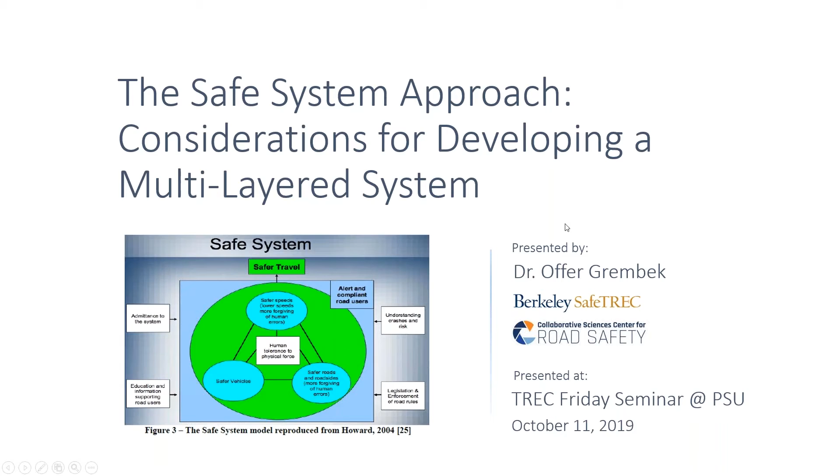As some of you may know, California this week has had a lot of electric outages, and it was part of PG&E's public safety power shutoff. And they identified 3 elements as to why this shutoff was necessary: low humidity, sustained winds, and dry fuel on the ground. And as a result of that, they said that they need to make a significant major shutoff to maintain safety. And when I heard it, I started thinking of how does this relate to transportation safety. And I noticed that they are very focused on what are the things that can make it unsafe.

And the response was, to maintain safety or to produce safety, we need to cut off the power to more than 730,000 accounts. These are not people; people is way over 2 million across 34 counties for 3 days. So the UC Berkeley campus was shut down for 3 days as a result of this. And the outcome, as was described by PG&E, is good because there was no fire and no one got hurt. And that would be true if their goal is to produce safety.

But if you're able to produce safety by shutting off the power, you're not quite fulfilling the mission of your organization. Because the way I see it, their purpose is to provide electricity subject to a set of constraints. And that's really related to what I'm going to talk about today, which is the safe system approach. The idea is that we need to provide mobility, but again, subject to a set of constraints. So what I'm going to talk about today is 3 things. I'm going to start by talking about the safe system approach and how it relates to safe vehicles, safe roads, and safe speeds. Safety buffers, which are all of these multi-layered components that together provide the opportunity to build a system on which no one can be severely or fatally injured. And then at the end, touch on some of the policy implications, because we do want to be able to translate this to practice and to policy.

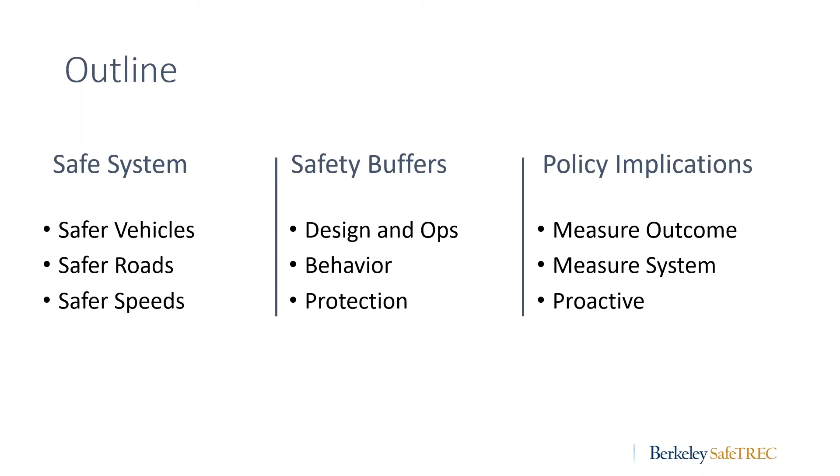So as I said, and I really appreciate PG&E's timing, the purpose of the transportation system is to provide mobility. Now, this isn't necessarily a consensus definition, it's more my definition, but if you pause for a second and think about it, I'm sure that you'll agree that at the end of the day, this is the overarching goal. But it's always subject to a set of constraints. We need to provide efficient mobility, cost-effective mobility, equitable mobility, sustainable mobility, and the theme of my talk today, safe mobility. Now, all of these constraints are equally important. I'm a little bit biased because I do traffic safety research, but in my mind, safe mobility is the most important one because it's a transportation failure that results in someone not getting home.

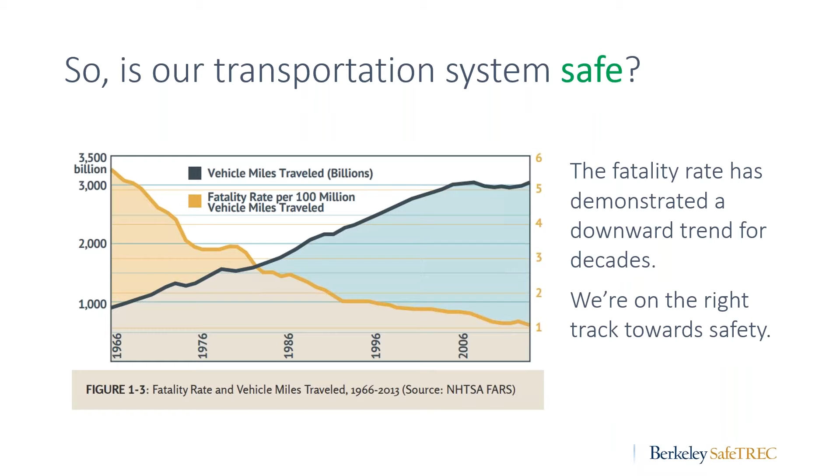So is our transportation system safe? Well, let's look at the numbers. This orange curve represents the fatality rate per 100 million vehicle miles traveled. As we can see, for decades, it's been dropping. So there's some demonstrated improvement. Maybe we are on the right track to achieve safety.

The number of fatalities per year, the numbers are very high. In California itself, just in California in 2017, there were over 3,600 fatalities. In the US, over 37,000, and globally, more than 1.3 million. So it's definitely not a safe system, and we're definitely experiencing a lot of fatalities.

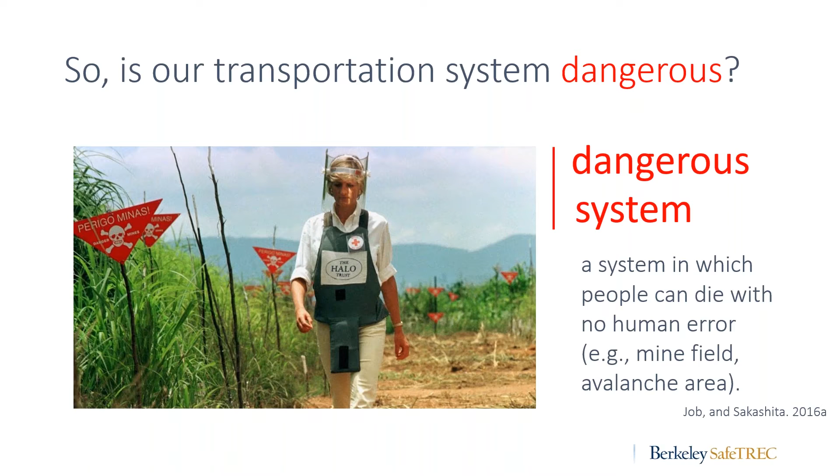So is our transportation system dangerous? Let's look again at how can we define it. And here it's defined as a system in which people can die with no human error. It can be a minefield, avalanche area. So even if you did nothing wrong, you can still die. So we're calling that a dangerous system. So we're not a safe system, but we're also not a dangerous system.

So what is this transportation system that we have? It falls in the middle. It's an unsafe system. And an unsafe system is one in which people can die through human error. So if all of the system does exactly what it was designed to do, if all of the road users behave exactly as they are expected to behave, maybe it will be a safe system, but the reality, as we know it, is that things do go wrong, and then as a result of human error, people still die.

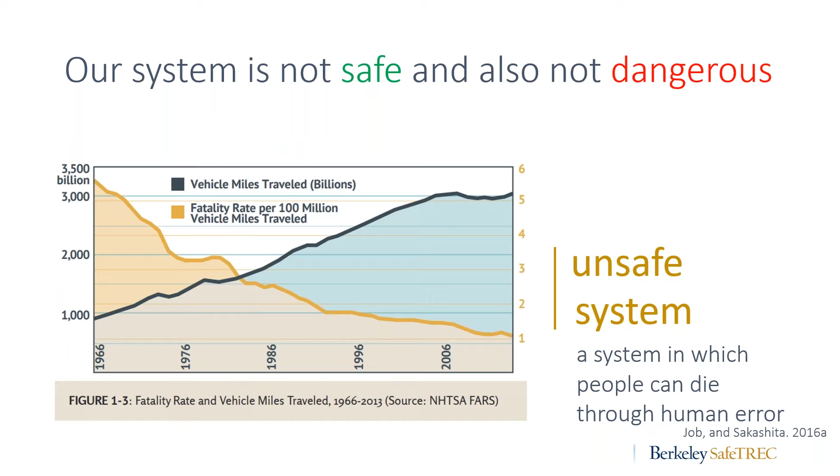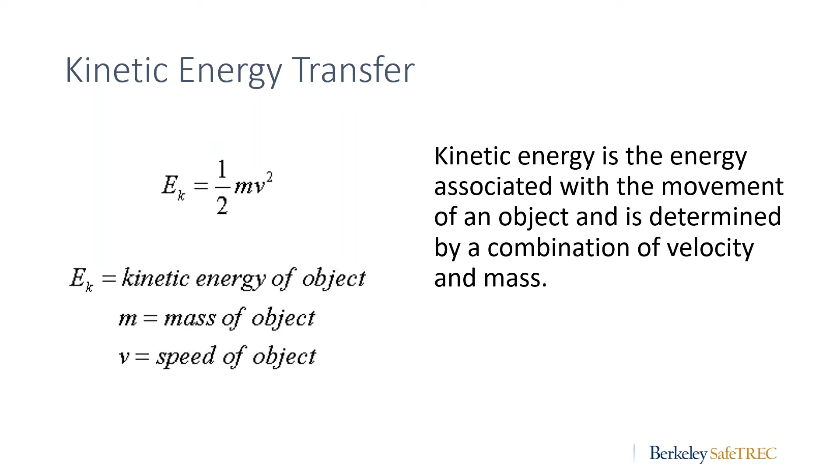Now, all of these deaths, we know that at the end of the day, it's not necessarily the crashes that are a problem, but it's more the kinetic energy. And it's the kinetic energy that is the transfer of this problem from a crash occurring to a fatality or severe injury, because it's this kinetic energy that our bodies cannot quite sustain. So why is kinetic energy so important? So as I said, first of all, it's because that is the source of injury.

But second, it's also because our traffic system is multimodal. And we have a variety of road users. We have pedestrians, we have bicyclists, we have powered two-wheelers, cars, SUVs, buses, and trucks. And actually many more modes. And these different modes, they carry different amounts of kinetic energy based on their mass and their velocity.

These are just numbers for urban environments. They're not necessarily accurate of my weight also, but they help us demonstrate that there's a very big range between the 0.1 kilojoules that are carried by a pedestrian and 57.6, 500 or 600 times more kinetic energy that's carried by a car. Now, if this is at urban speed of 20 miles per hour, you put that on a highway and the kinetic energy is even much greater.

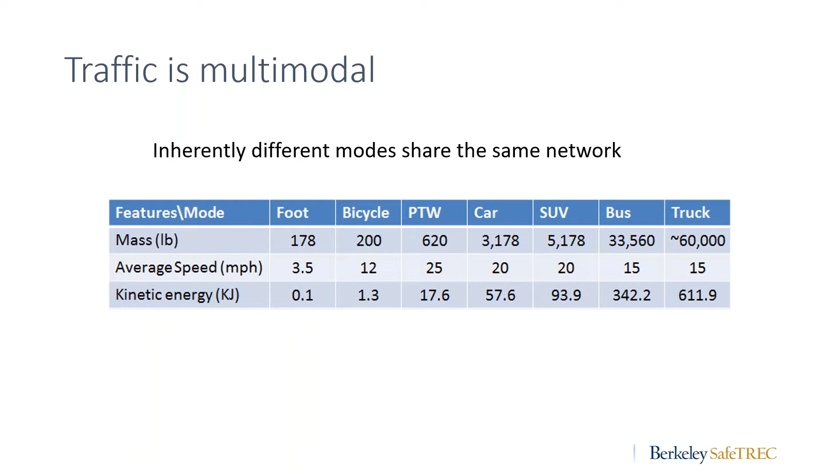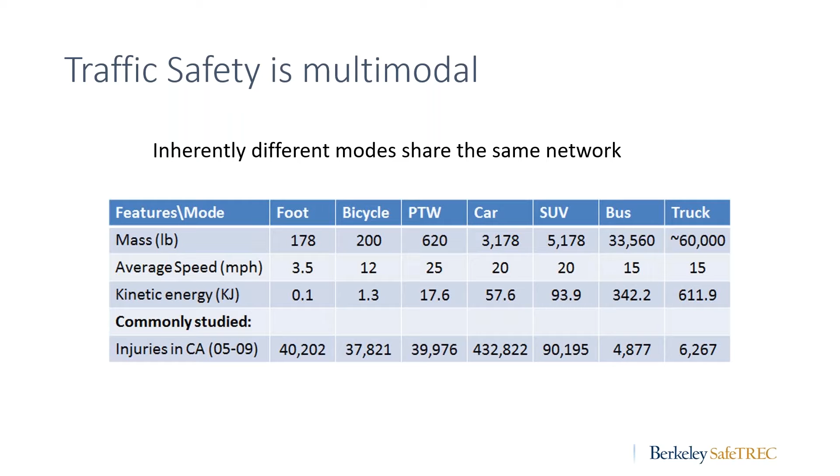So we see that we have this multimodal system, and as a result of that, we also need to think of safety in the multimodal context, because there are all these different modes that are mixed together, carrying very different levels of kinetic energy, and that imposes a lot of complexity on our system. So we try to think about that in a little bit more structured manner. And in our center, we developed this multimodal injury matrix.

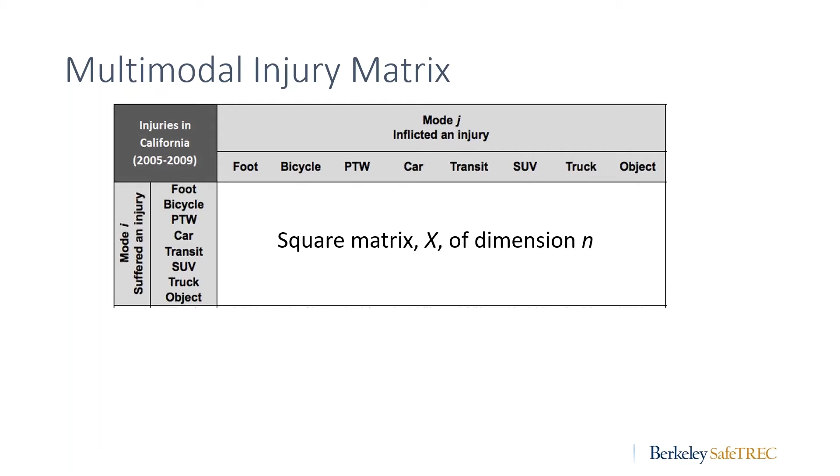Now, suffered and inflicted does not necessarily mean fault, but it means there was a result. There was a crash between two modes, and as a result of that, this mode suffered an injury. By definition, the other mode inflicted that injury. If they both suffered an injury, then it counts twice, because there were two injuries that were experienced.

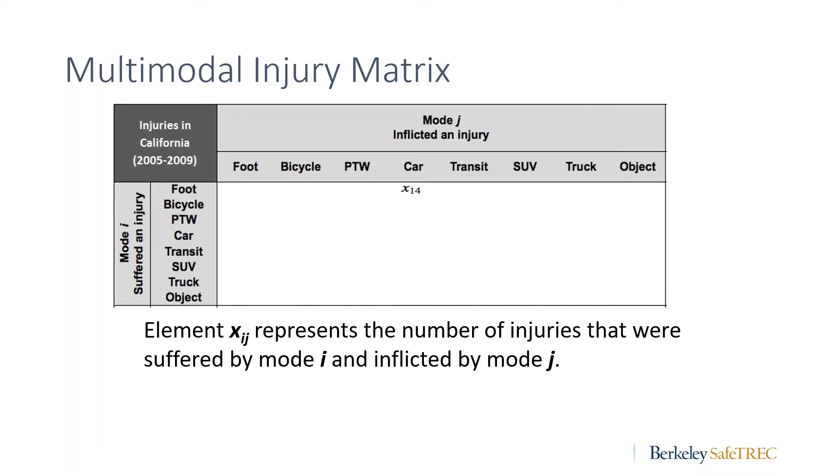So what it means is that element Xij of this matrix represents the number of injuries that were suffered by mode i, X1, and inflicted by mode j, X4. Okay, so if a pedestrian crashed with a car and only the pedestrian suffered an injury, X14 would have 1. If both the pedestrian and an occupant of the vehicle suffered an injury, then X14 would get the value of 2. Okay? And then we populated that data for injury crashes in California.

And it's kind of a nice snapshot of what modes are inflicting and suffering injuries from other modes. And I'm not going to go into the details of what the different cells mean, but I'll talk much more about the aggregate. So when you add up all of the rows, you actually get the numbers that we're usually talking about in traffic safety, and that's the sum of pedestrian injuries, the sum of bicycle injuries, and so on. But these sums give us an opportunity to see what is the relative vulnerability of these modes for the California mode mix and built environment.

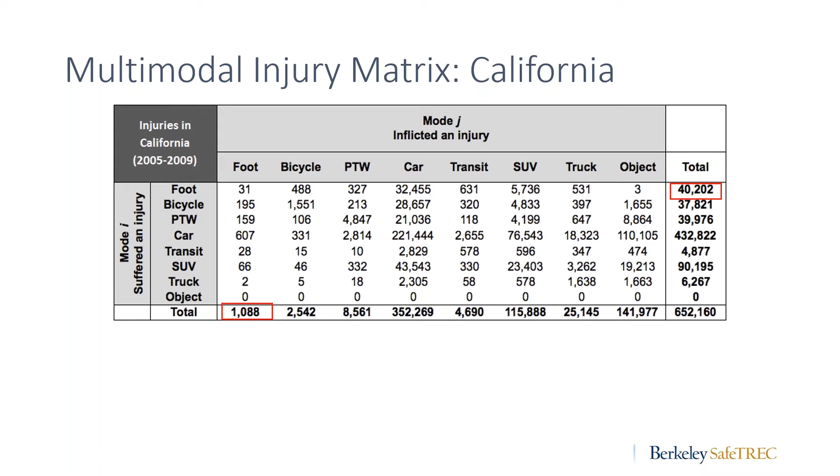So if we take the 40,202 pedestrian injuries in California, or injuries suffered by pedestrians, and we divide it by the number of injuries inflicted by pedestrians, we get a rate, and we're calling that rate the relative vulnerability. So in this case, it comes out that pedestrians suffer almost 37 times more injuries than they inflict.

Now, usually at this point, I get a question: how can a pedestrian inflict an injury on the car? And the answer is, well, first of all, it doesn't happen much, but it can happen that as the result of a crash with a car, there will be a rollover, a vehicle might crash into some roadside elements, and as a result of that, the car occupant can also suffer an injury.

Now, when we do the same across these different modes, we'll get this vector that is organized in a way that's the same as the kinetic energy that they're carrying that we saw before. And it helps us illustrate how complicated it is to design for a system with so much variety of road users and kinetic energy.

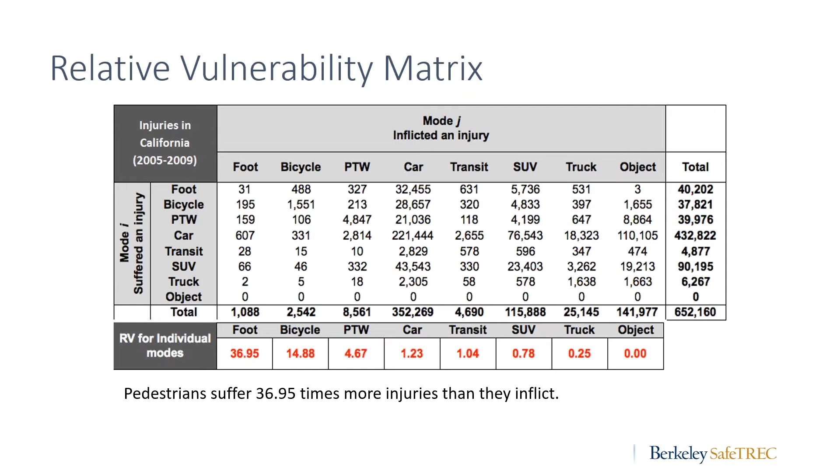So all of these realities, that there's so many crashes and there's these multimodal misalignments, lead us to thinking about what can we do to move the needle from our currently unsafe system to a safe system on which no one can be severely or fatally injured. And fortunately, there's been a lot of thinking about this. It started with the work they did in Sweden with Vision Zero, in Australia with Safe System, in the Netherlands with Sustainable Safety, and in the US with Road to Zero and Towards Zero Deaths.

And they all have a slightly different flavor, but they all have a common denominator: first, they challenge our ability to reach zero without making a major change. And the second part is that they're all multi-layered systems approaches. They think about it from the perspective of the system. So what I'm going to highlight in the next few slides is how this translates in terms of the safe system approach. And as I said before, Vision Zero, very similar, Sustainable Safety, very similar.

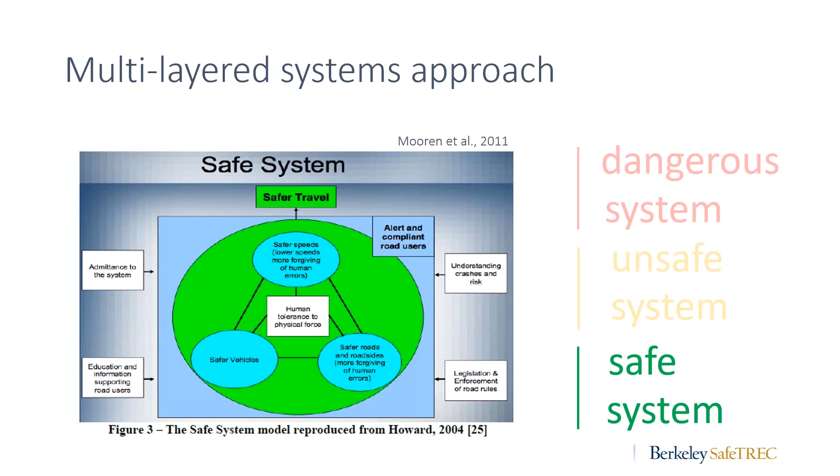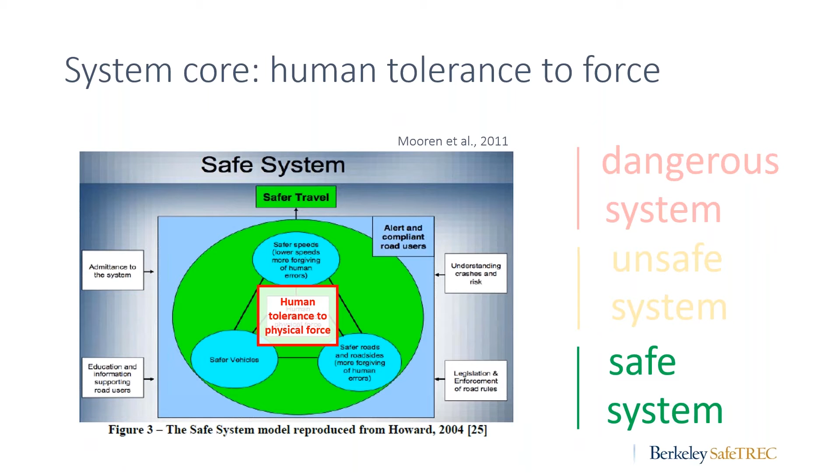And it all boils down again to human tolerance to physical force. And that's something that I keep on iterating in my talk, but it's also something that is consistent across these different approaches. So at the core, we have human tolerance to physical force. And as you can see around it, we have three components that I'm sure you all are aware of and have been thinking a lot about.

The first one in the bottom right is safer roads, and that's the design of the road facilities. The second one is safer vehicles, and that's the design, crashworthiness, and other elements of the vehicle. And then the last one is safer speed.

And we typically think about all of these. There's nothing new here. But what these approaches do, they remind us that it's not just about the individual capability of all of these. It's much more about alignment. So we want that the combination of the roads, the design of the roads, the design of the vehicles will be aligned with the speed that the vehicles are actually going.

So it's not that we just want to reduce speed or we just want to increase speed. We actually want to manage a speed that would allow vehicles, pedestrians, bicyclists, would allow the mobility without compromising their inherent tolerance to physical force.

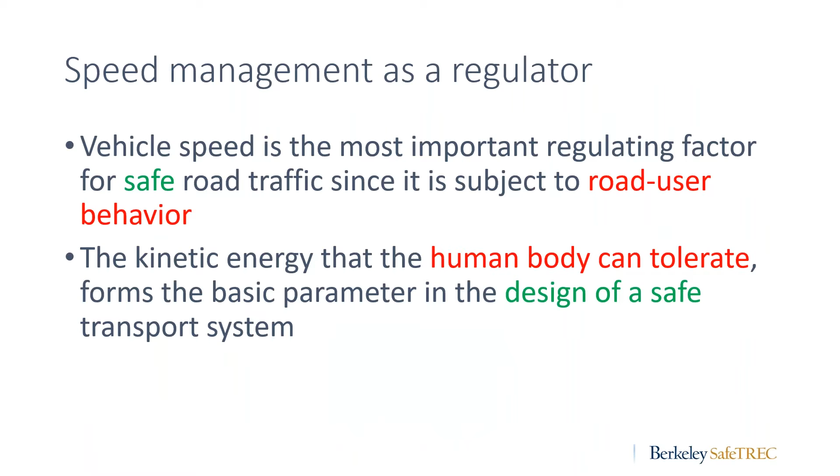I'll skip this a little bit because I want to be more mindful in time.

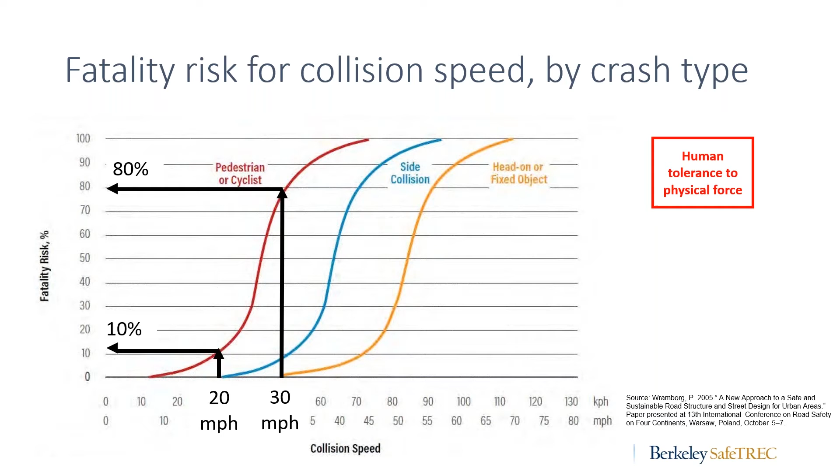So that is what captures this human tolerance to physical force, and it's based either on crash reconstruction or simulation studies. So that's item one. Then based on that, it helps identify what an acceptable or a safe car can accomplish. So based on these curves, a safe car can protect occupants up to 45 miles per hour in a head-on collision. Similarly, it can protect occupants up to 30 miles per hour in a side collision, and at what velocity it can also provide protection to unprotected road users.

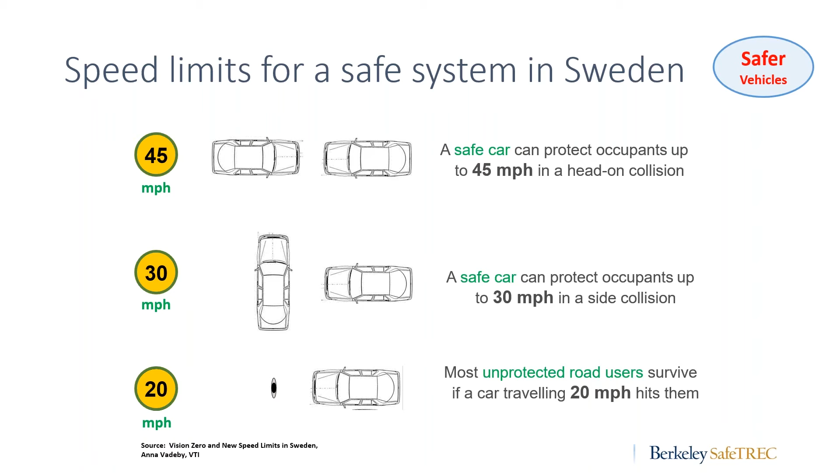And then that's where the component of the safer vehicles comes in, because the vehicles have a lot of protective capability, much more to the occupants than to the unprotected road users. But again, it brings the idea that now we need to consider the cars. And then the last piece is, what should be the speed limit given the human ability to sustain force and the vehicle design? Then we set the speed limit based on that.

So if we have roads like this, rural roads, two-way, and we saw that at 45 miles per hour the vehicle can provide protection to the users, then that's what we set the speed limit at. Similarly, if we have a much higher quality facility, such as the one here, they call it in Sweden 2+1 roads. So they have two lanes in one direction, one in the other direction with a cable barrier in the middle, and then every few miles they alternate.

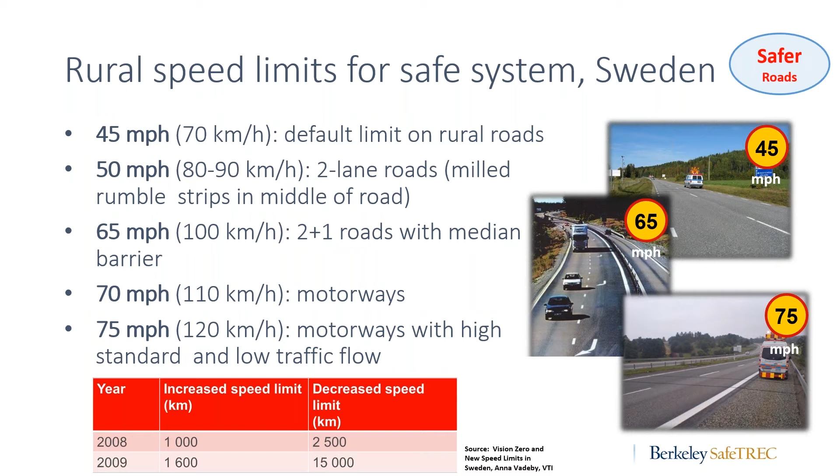And what that does, it almost eliminates head-on collisions, which we saw are the most fatal ones. So once that element is there, now they can increase the speed limit to 65 miles per hour because there are not going to be a lot, preferably no, head-on collisions. So now we can afford to go at faster speed. So that's where the safer roads come in. So we're creating this triangle of roads, vehicles, and speed.

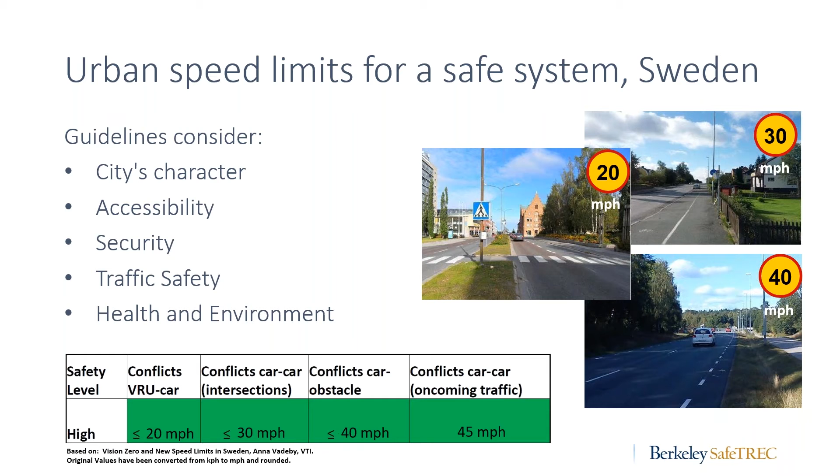Similar things are happening in urban environments, but over here they kind of just set the maximum, but they allow the agencies to reduce that even more based on some other guidelines that they need to consider.

So we talked about what's at the core of this, and we didn't really talk about the users. And when we think about traffic safety, the users always come in. It's always about the users and a lot of blaming of the user's behavior. And the safe system approach actually recognizes that as humans, we're far from perfect. And the requirement is that the users are alert and compliant road users. What do we mean by alert and compliant?

And I always like to use these minions to explain it. So here on the left, we have a goody two-shoes minion. And this minion is not me. And this minion has always had a full night of sleep, is always happy, is always on time, and he does things exactly as was expected.

That's on one end. And on the other hand, we have a much more error-prone minion, which is a lot more like me. This minion's name is Carl, and Carl is always a little bit tired, sometimes gets emotional, a little bit late, and he's always kind of just not necessarily meeting all of the expectations for every single moment. There are times that Carl is doing it well, but every now and then he is going to mess up.

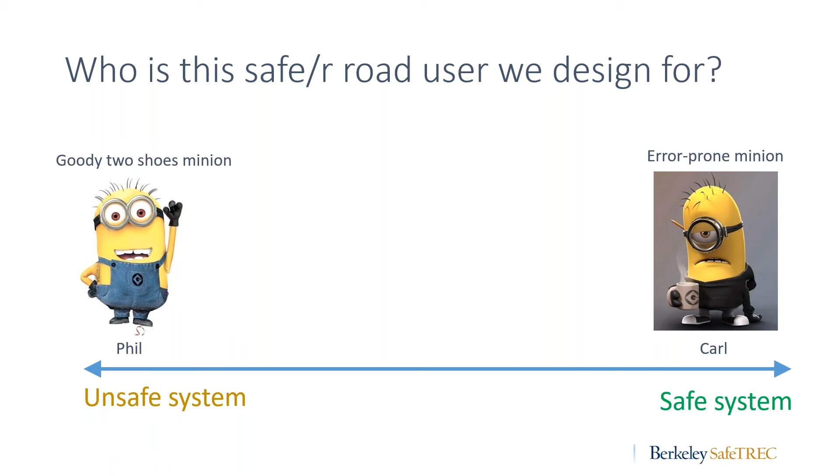And that is important because if we design our system for people like Phil, since we're not all like Phil, at some point we're going to mess up, and that will result in an unsafe system if we expect everyone to behave perfectly. But if on the other hand, we recognize that at some point we will make a mistake as a result of misjudgment, as a result of some instantaneous lapse of attention, we are much more likely to have a safe system because we've incorporated enough buffers to account for the offsetting behavior that some of these road users will do.

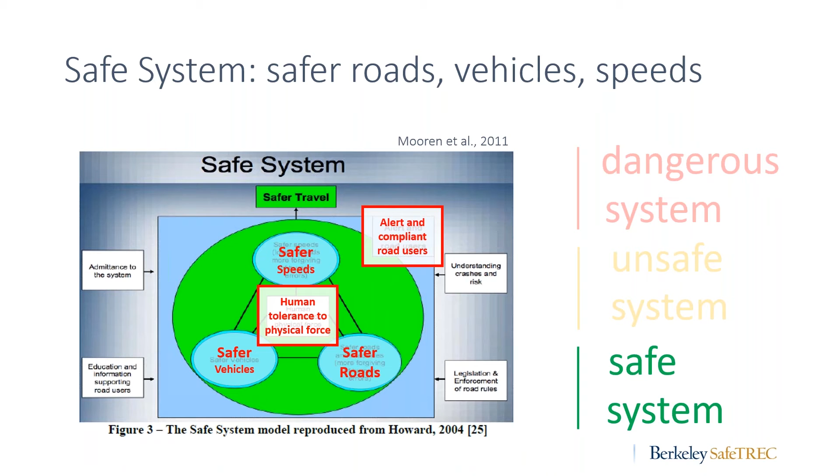So these are the guidelines, or these are the basics or the fundamentals of the safe system approach. And again, it's this triangle of safety combined with recognizing that the road users are going to mess up. So where do we go from here?

Because even though this is clear, it's well articulated, whenever we come to talk about it with agencies, they ask, okay, so what am I doing tomorrow? Or what does that mean for policy? And we haven't found a good way to answer that question, because the answer is, oh, we should aspire for 0 deaths, and we should just keep on doing what we're doing with more intention. But that doesn't necessarily give us the traction that we need.

So what we're doing now in a project that's funded by another national UTC, the Collaborative Sciences Center for Road Safety, we started a project that's attempting to develop a framework to combine these different protective elements or features of a safe system. And the way we're doing it, when we started, we tried to see if we can articulate what is the essence of the problem that we're trying to solve.

And we took the case study of cyclists, and we came up with this paragraph. What we want is alert and compliant riders to make trips using safe bicycles on safe street design with adequate separation from safe motorized traffic, driven by alert and compliant drivers, all of which are governed by safe speeds and supported by effective cyclist protection and the medical emergency system when needed.

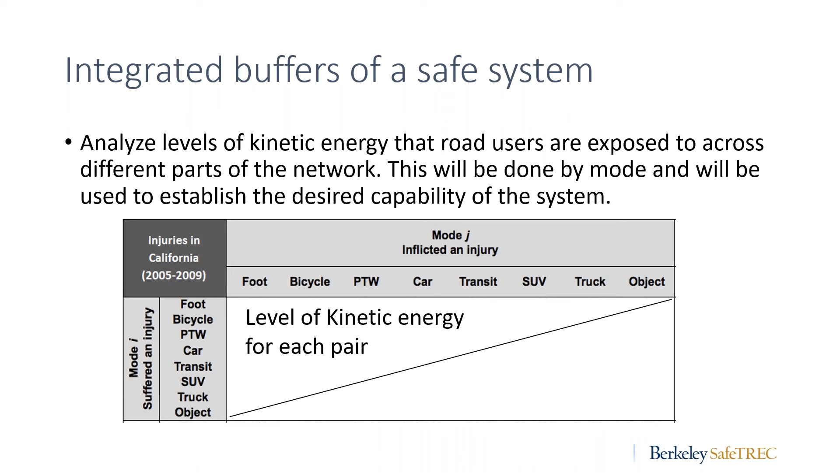So what are the policy implications? If we're able to quantify the level of kinetic energy carried by these different users and different conflicts that the empirical data tell us is being realized, then we're able to set the policy and say at these type of facilities where there's a lot of potential conflict between pedestrians and cars, we would want the system to have the ability to cover or protect us from this level of kinetic energy. Whereas on the highway, there should be a different threshold that is set.

And then what we do, we would be in a position, or this is more of an opportunity, to look at our roads, combine it with the vehicles and with the speed, and then see if we're able to add it up to a desirable level that's set by the policymakers and is stemmed from the observable or empirical data about the level of kinetic energy that's actually carried by the different road users.

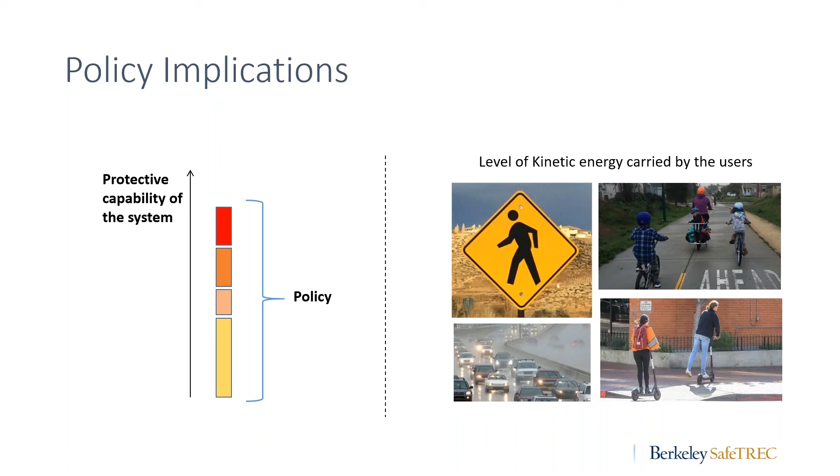So to summarize, I thought a little bit about what are the takeaways from this talk, or as SafeTREC described it, the learning objectives. And the 3 things that I thought are most important were to understand what is a safe system approach to road safety, and how this triangle of safety of road design, vehicle design, and speed is at the core of providing the level of protection to humans, and then how on top of that the layer of behavior comes along.

Then the second part is to recognize the different roles of the core protective opportunities provided by the system and the challenges that we're actively dealing with to aggregate it and to quantify it. And then the last part is to appreciate the policy opportunity created by adding non-crash safety considerations. Today, what we do, we just quantify the outcome. We want to get to 0 deaths, but that's what we count. We just count the number of deaths, and when it goes down, we know we're moving in the right direction.

What we're claiming here is that it would make more sense for us to set the threshold. This is the level of service, if it's appropriate to use that term, but this is the level of safety that we aspire to. We want the system to be able to provide this level of protection. And if that's something that you can actually measure, then each of the agencies that are involved in this process can have a more defined role and don't necessarily roll over the responsibility.